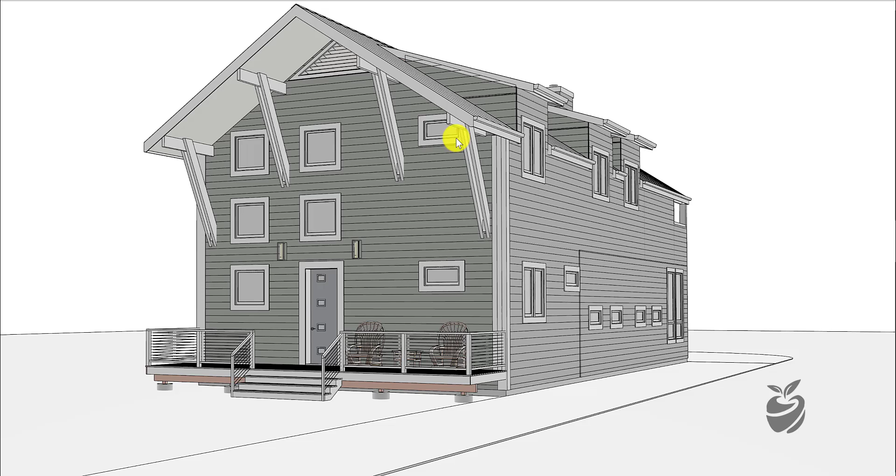One of the owners asked to make sure we could have a two-story space when we enter, and so we're granting that with a stairwell which goes up, and the ceiling will come from 6 feet and then come up, stop at 10. So we have 10 feet floor to floor on both floors, and the style is sort of craftsman-y, with the required structure to hold the roof, the 8-foot roof extension.

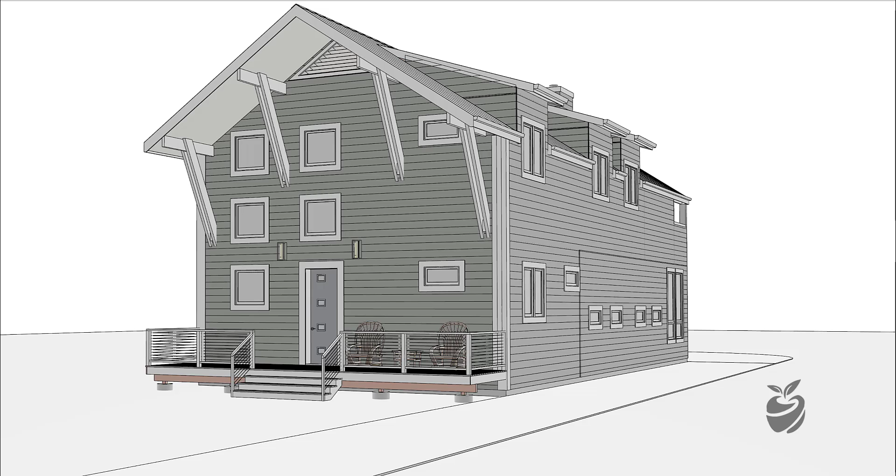Up above we will be venting the attic, and it'll have an incredible amount of insulation piled up to about here, for about an R90, and then we're going to vent all that. We'll use a stainless steel cable system, so sort of a contemporary craftsman look.

As we start to go around the house, the bedrooms are upstairs. We have escape windows, and an office with window lining up there. We have a bathroom window on that level, and here we have countertop level windows with cabinets above in the kitchen area and an entertainment room area.

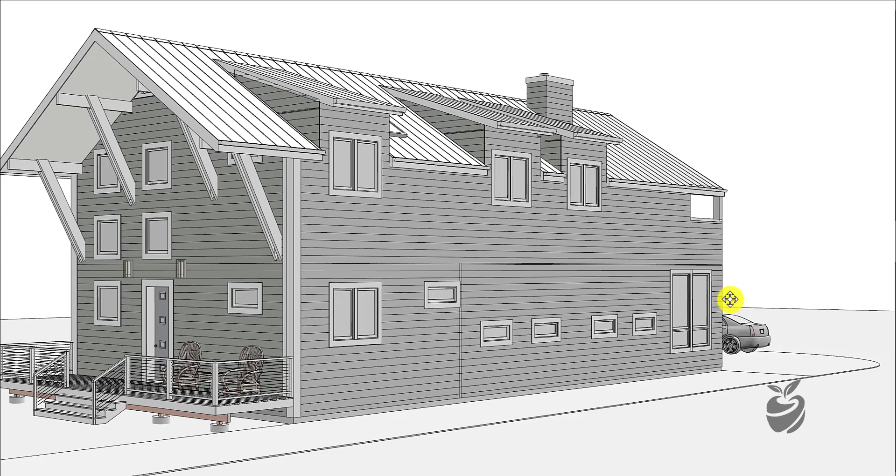And then we have a sunroom, as this faces west. Going around to the back, we have an incredible amount of nice sun. We also will have a chimney with a fireplace that comes up.

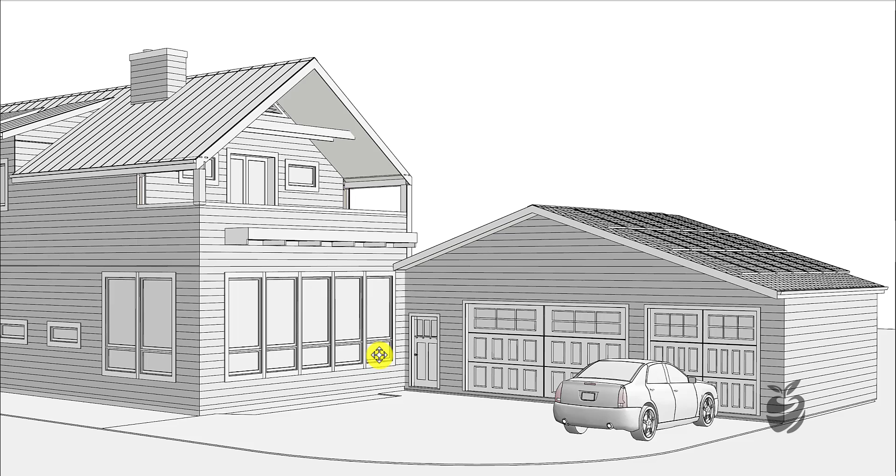Around to the back side, the sunroom is 13 feet wide on the interior, similar to another room that was shown, so the furniture placement can be the same. This one will have all the operable windows down below, fixed units up above. These go from 9 feet to 1 foot off the floor, so there's an extensive amount of glass facing south and west.

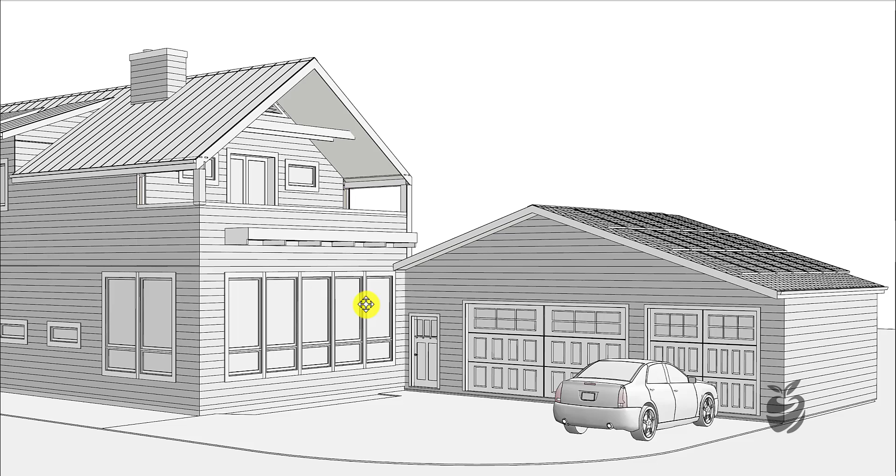We will provide a protective overhang that will allow the south sun to penetrate in the winter and shade in the summer, so it doesn't overheat. And up above, on the back side of the master bedroom balcony, we have cross ties and beams to support the roof extension across the balcony.

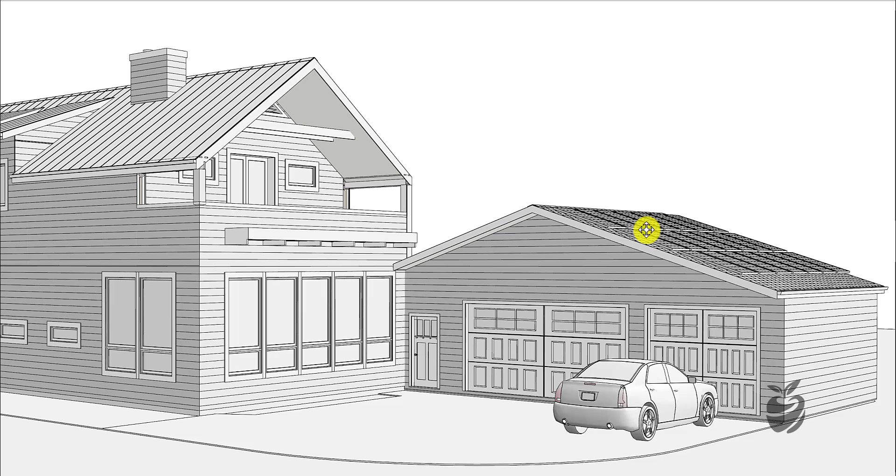Facing south, the roof over the garage goes east-west, so in this direction, so that this faces south. The ridge goes east-west, this faces south, so we can have a solar array on this portion of the roof. We create an overhang here because we're going to need a little bit more roof area to have the panels we need for enough power for the house.

Here we can see a little peek of the balcony space above, the sunshade device, and the dormers that spring from 6 feet and very quickly go to 10 feet. Skylights at the bathrooms here and here. Laundry room.

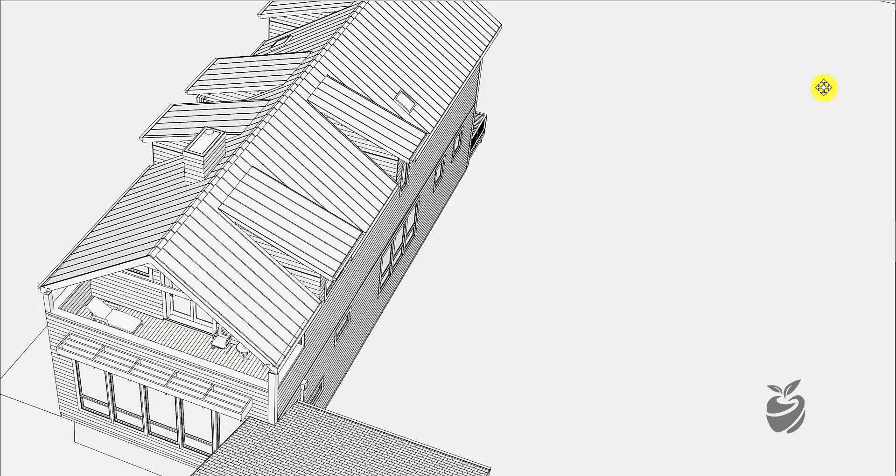On the side facing east, we have large windows in the dining room that spring from 8 feet, with operable windows on the bottom. These are part of the stair, which is 2 stories in the foyer area here. This stair goes down to a new basement addition. A little window in the mudroom.

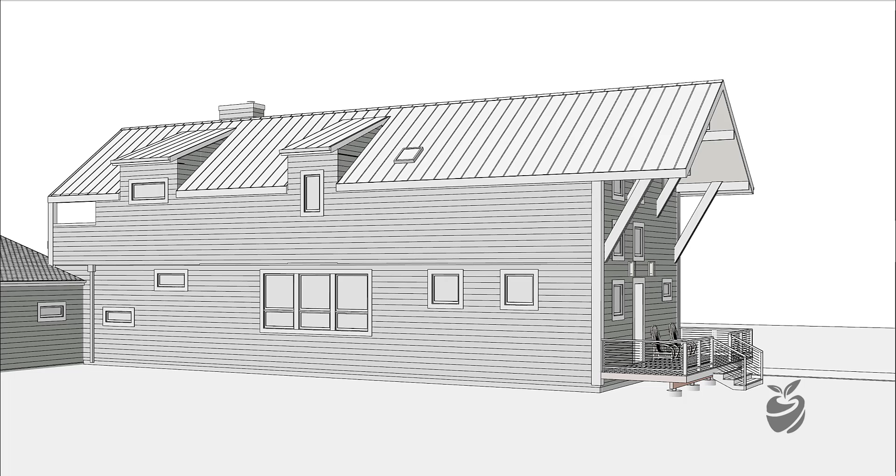If the budget will allow, we will go for a metal roof. If not, we will go for a shingle roof. That is on the garage.

A peek of the floor plan of the basement. See where we have now created an existing crawl space. We will add a basement that will be about 9 foot clear to the floor, and then a 3-car garage.

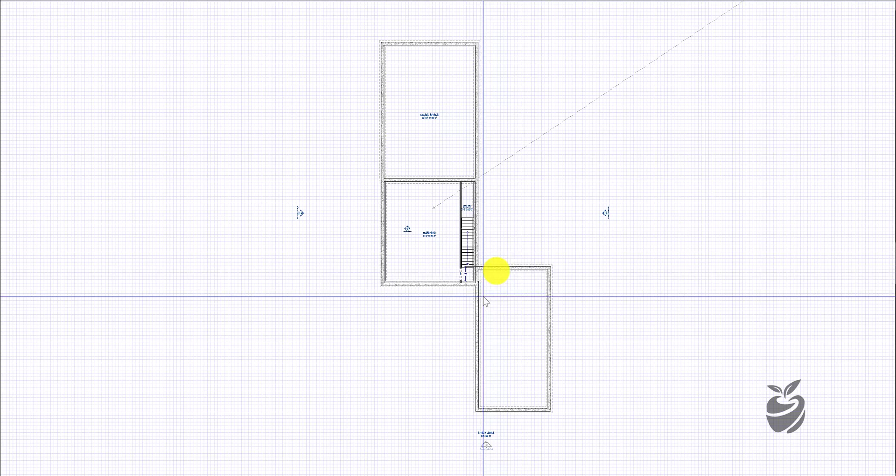Okay, let's take a peek inside. You can see the 2-story foyer as it comes up, and we have the same contemporary railing detail there, with windows

that rise up. Since we have a 10-foot ceiling, we don't have to have a 10-foot closet. We stop the closet at 8 feet and continue that ceiling detailing all the way across. These are 3-foot centers, and that just creates a nice feeling that this is a large loft sort of space.

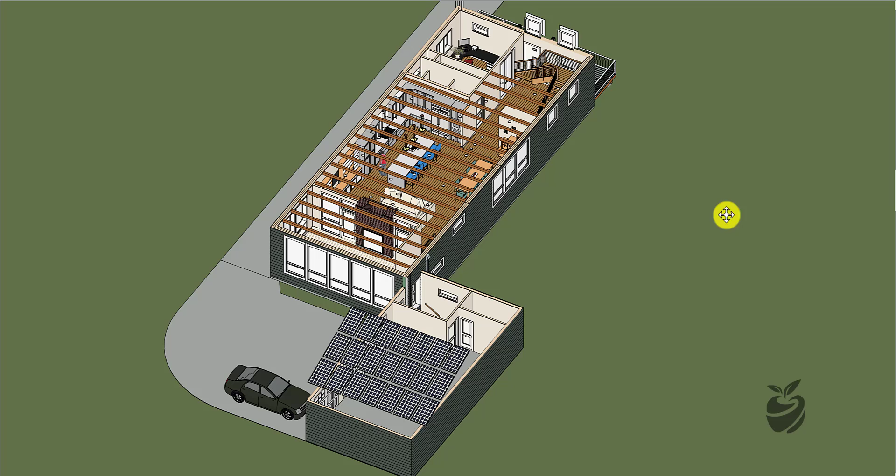8-foot glass doors into the office area. This can also be used as a bedroom sometime in the future, so we have a closet built in. Maybe we take the doors off and this becomes shelving space until it becomes a bedroom.

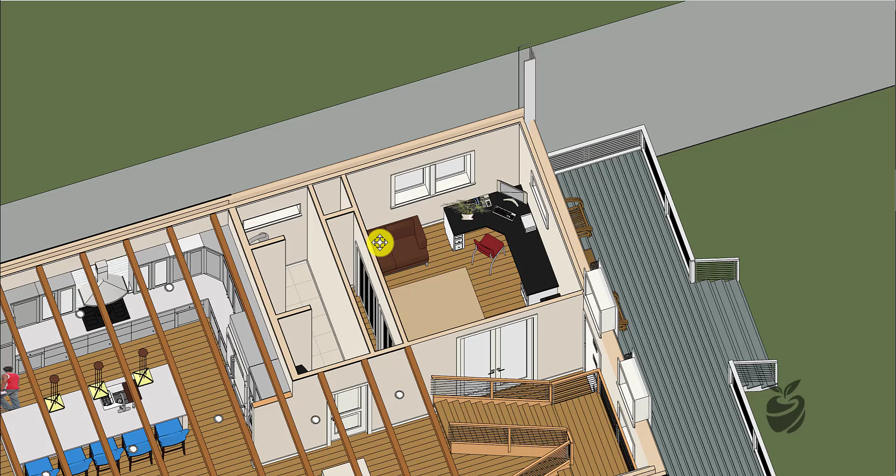The powder room has a very nice sink, about 4 feet across, very generous. We hide the toilet so no one can really see it with the door open coming by. And then we have a roll-in shower, so the wheelchair doesn't have to trip over a bump to get into

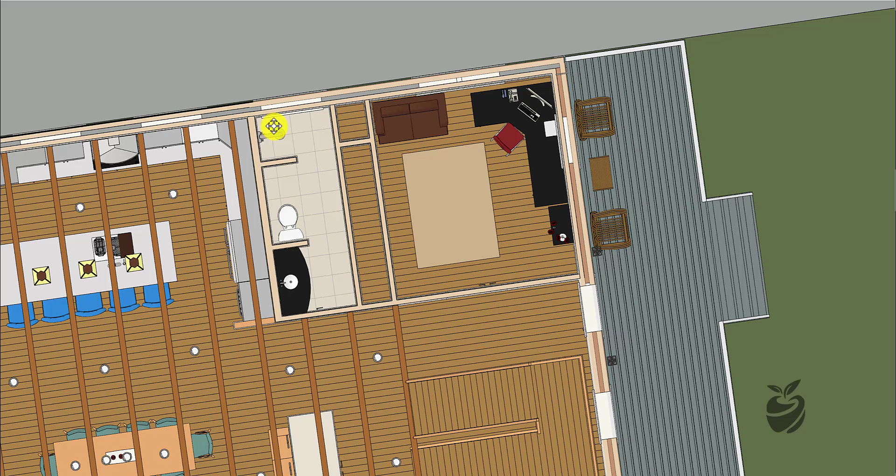the shower space. As we move into the kitchen area, we have oven, microwave, 4 foot of refrigeration, countertop, cooktop, induction because it is a net zero home, so we don't want gas combustion occurring.

Glass cabinets on each side, very similar to another home that the clients liked, I believe the parents' home. Again, a large 12-foot island, very similar to the setup in their parents' kitchen, which they like.

And then we continue with some possible built-ins on this wall for the family area. Put the TV here. If we need to make it bigger, we can make these a little smaller, have a wider screen, maybe even with a tilt-out arm, so that people sitting here can watch the TV, if TV is a large priority.

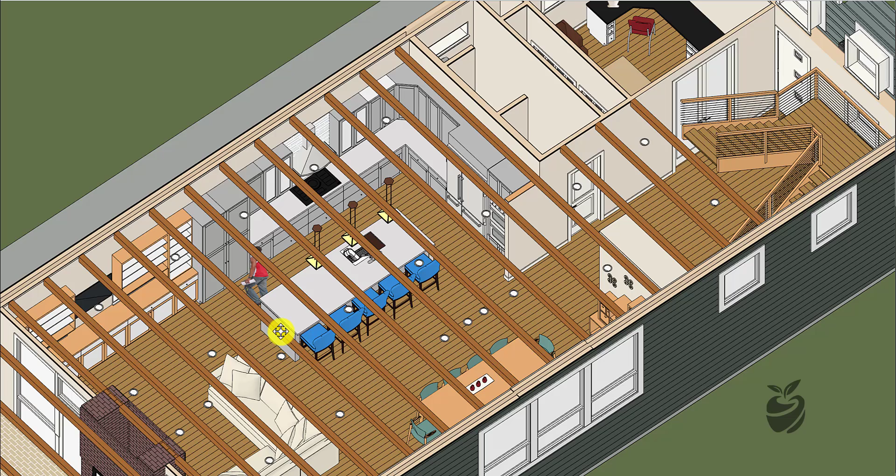2 large pantry cabinets, which is plenty for a young family.

A very nice dining area can be developed with a long table, and again, it faces the window. There's a nice tree in the 20-foot side yard that we'll have a wonderful view of.

We place the windows up at 3 feet in case we want to put some furniture below the windows here, adjacent to the dining room. Something like this can easily fit below there.

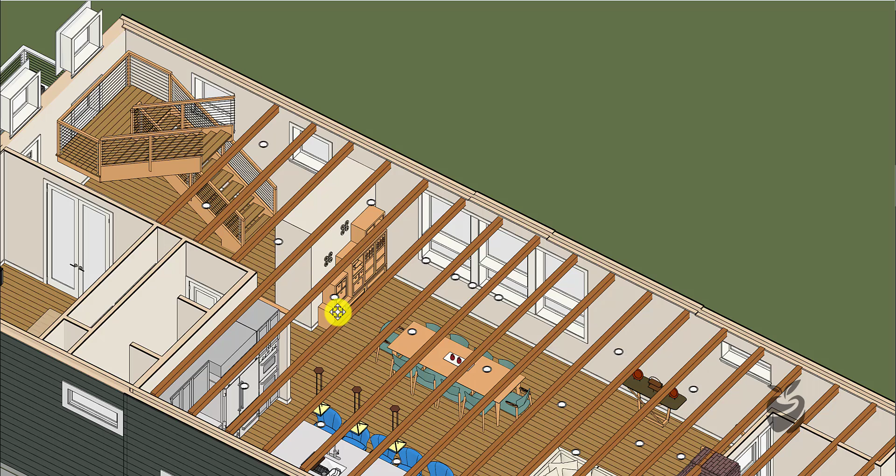Some light to highlight the stair going down to the basement. Maybe this is the area for the china cabinet.

Here you see the stairs going down to the basement. We have the same railing detail, and a lower window that follows the stair to light up that stairwell.

And here we have the main feature of the house, which would be a masonry veneer fireplace with gas log burners, glass. We will seal it off on both sides. It's see-through so that we don't lose heat in this passive home.

We can't really afford to have air coming in and going out the chimney with all our energy. We're really trying to minimize the heat loss, so getting very, very tight construction is very important.

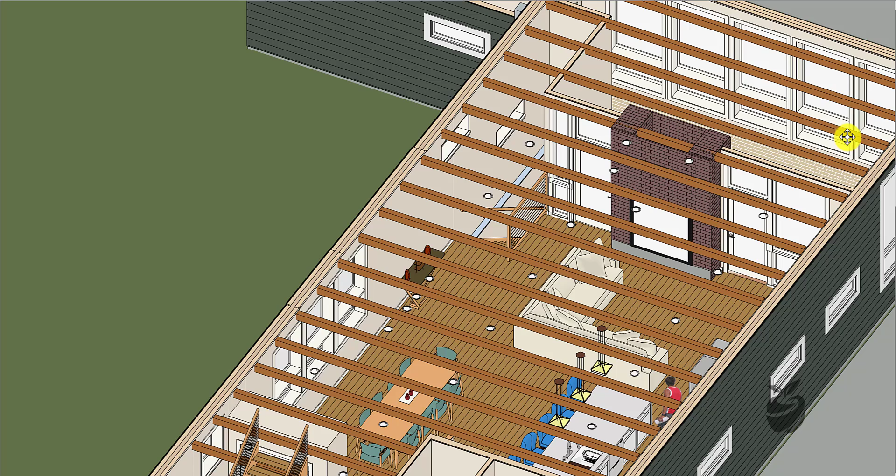The sunroom features a tile floor because we want to pick up passive solar heat when all the sun penetrates through the glass. It then can heat up the tile, and the tile can then absorb it as it slowly irradiates it back into the house.

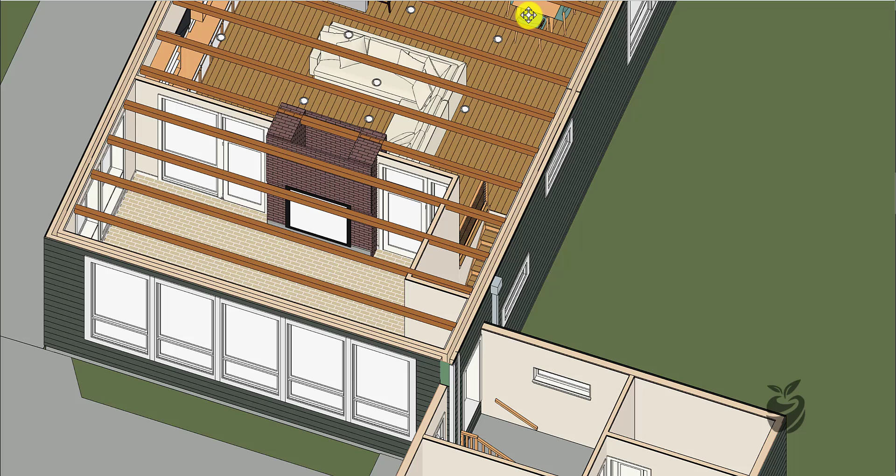And we can control the heat by opening the windows if it gets too hot, and we let it into the house with the doors that will open, and perhaps also a fan which will take this heated air and circulate into the house. I'll probably use a Zehnder system to make sure we always have circulation of nice air into

And the people from the garage going through this door and into the mud area hang up their coats, boots, and then enter the house and go up.

Here we're going to have the electrical room, as we'll take the solar stuff, feed it down into the electrical, into the inverter, and we'll have the battery storage in here, in this room as well.

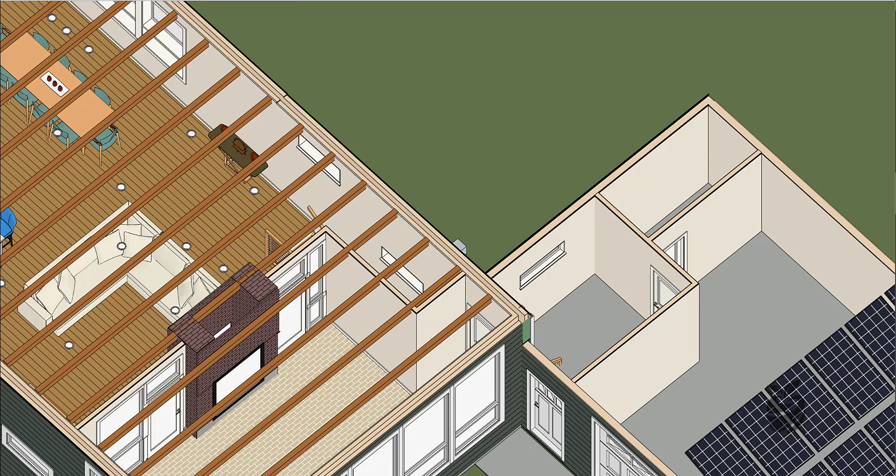Okay, the master bedroom, balcony area, overlooks the wonderful yard. I thought it would be nice to just keep it nice and private with the 42-inch, actually 36-inch half wall.

And you can sit down, read your book, and even in a light rain, we have the covered roof. So it's a very private balcony area with a 5-foot

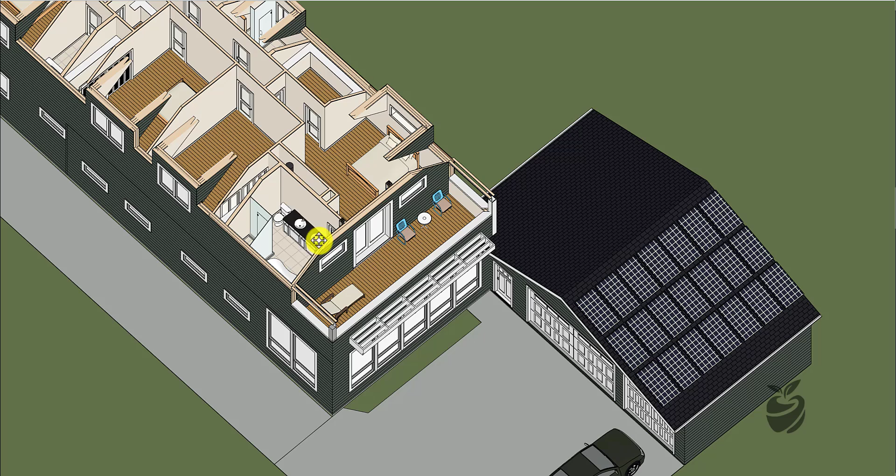door that leads you out, and windows into the bathroom, a window into the bedroom, a window above the bed, plenty of room for a dresser on each wall, and a night table.

Let's take a peek at the bathroom a little closer. When you enter the bathroom, you'll have a tub and a nice shower. So that's your view. This is at 6 feet, and then it very quickly goes to 10 feet.

10 feet. The dormers are over here.

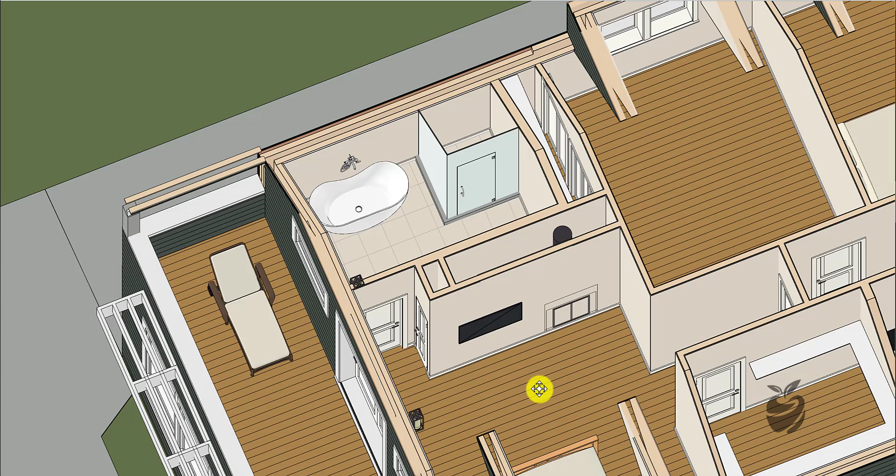We have a his and her vanity, mirror area, and a toilet for a very nice master bath. In the bedroom area, right across from the bed, we can perhaps place a big screen TV.

We do have the flues coming up from downstairs, which will be in this area. If we want to, we can have a second fireplace, or no fireplace and just put some bookshelves in here to save a little bit of money. So we do have the option of putting a second firebox upstairs.

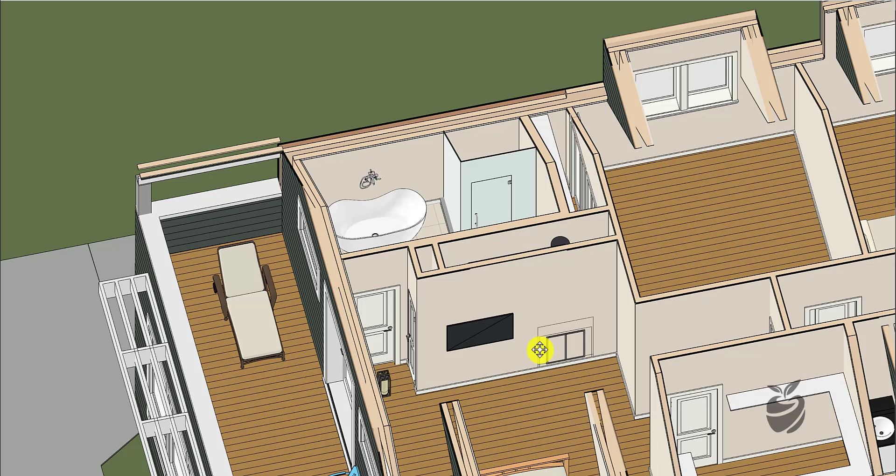Originally, the idea was to try to build a masonry fireplace all the way through, but because of the basement—here you see the basement—if we have our firebox here, which is nice and symmetrical across the width of the building, a masonry firebox, we'll have to build a masonry foundation for it, and it'll really split up that basement space.

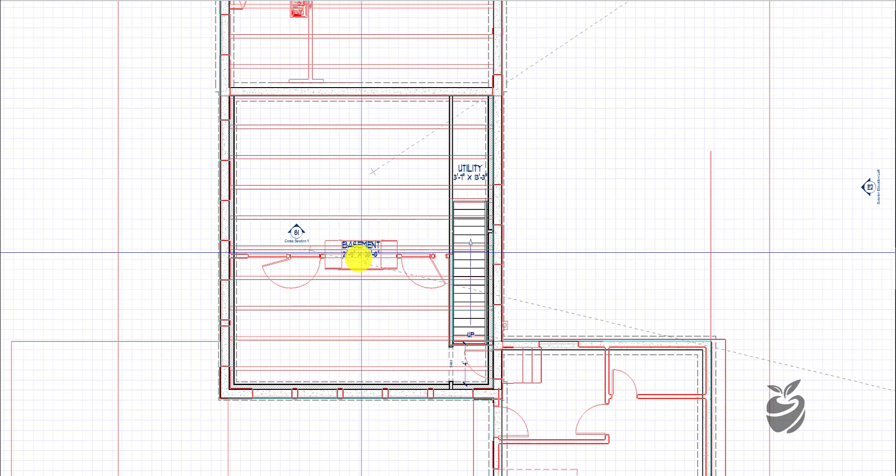So I think we want to have a nice clear space for the kids to play, so they have this large 30-foot room. We'll just put double trusses across the span, and then we can use a lightweight concrete firebox for the first floor.

Here we see in red the layer downstairs, and we have the firebox, and the flue would come up. In this area, we have the option of placing a prefab over here.

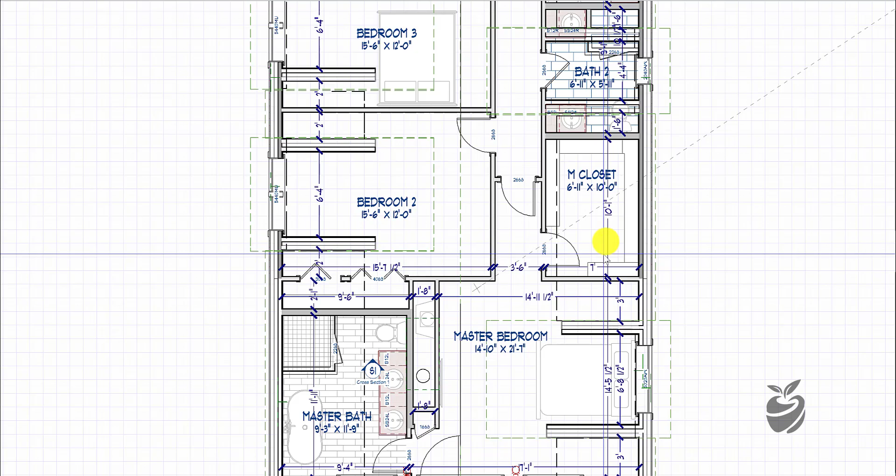We have a large walk-in closet, 7 by 10. Entrance from the hall is there. We have a door there, so we keep the wall space for dressing on this side and this side, with the high window there.

All right, taking a peek at a cross-section through the bedroom area. You can see the 10-foot ceiling here. We have the 6-foot spring point there, so a 6-foot-tall person is fine with no problem with head height. One foot away, you're at 7 feet. Two feet away, you're about 8 feet, and then you're at 10 feet.

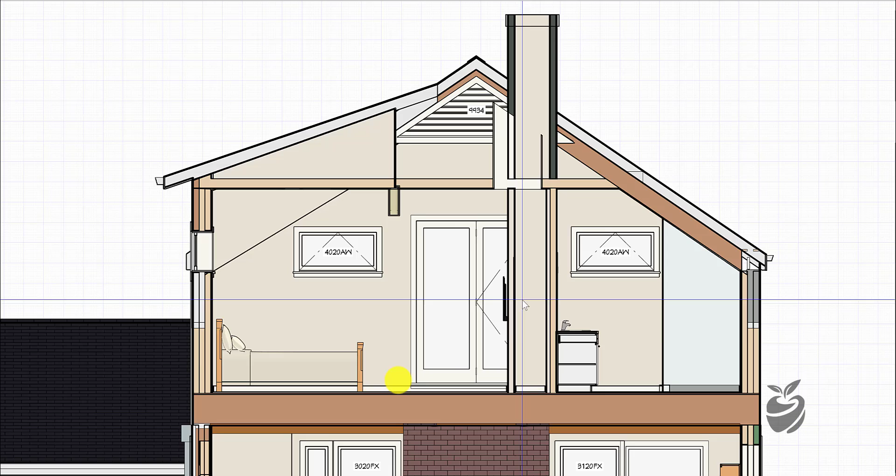Over here, same with the shower—6 feet on that side, you're at 8 feet, you're at 9 feet. That's about 9 foot when you enter the shower in the bathroom.

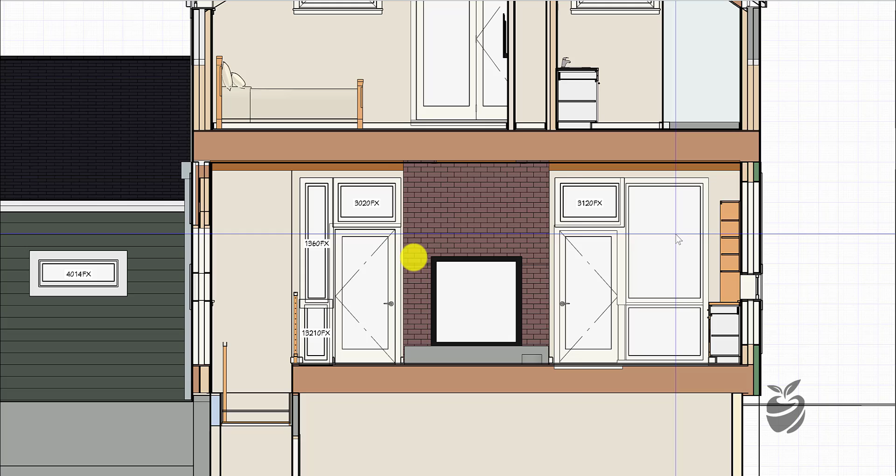The section drawing also shows the 10-foot ceiling. Windows are at 8, operable as counter height. This is at 9 feet. And a 6-foot door, all glass, into the sunroom.

Okay, kids' bedrooms are very generously sized. Closets, his and hers, matching closets. Again, the dormer that gets you to the 10-foot ceiling. Bathroom with a dormer that also gets you to the 10-foot ceiling.

His and hers, sort of Jack-and-Jill-ish, though we really can't connect them as a true Jack and Jill. I always think Jack and Jill bathrooms are actually a lot of waste of circulation space, because they take up a lot of room to get in on two sides. Here, it's a very compact use of space.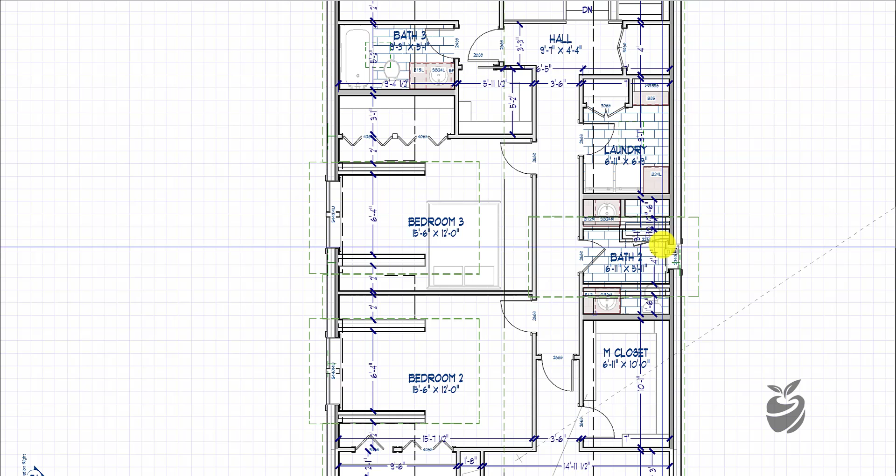Shower, toilet, in a nice-sized room. You come up the 2-story stair space, and you're in the 4th bedroom, which is a private bedroom with its own bath and a skylight for light.

And a laundry area, also with a skylight for light—washer, dryer, folding area, cabinets, and a very large linen closet for towels, sheets, etc.

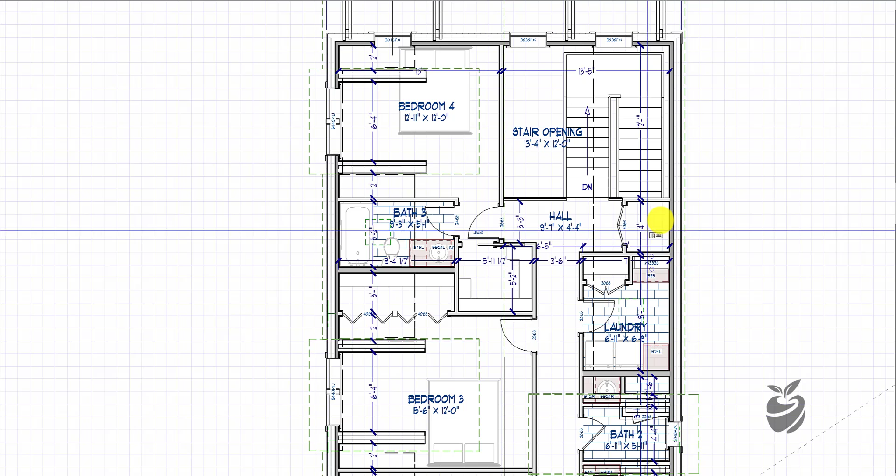Also nice, generous closets for this bedroom as well. And this is a possible utility area, depending on work with the consultants, for how we're going to take care of the heating on the 2nd floor, or bring it up from the basement. So that's something that needs to be discussed.

Okay, from this perspective, you can see the stair up to the hallway, the 5th bedroom, utility space, laundry area, shared bathroom, and a large his and hers closet for the master bedroom.

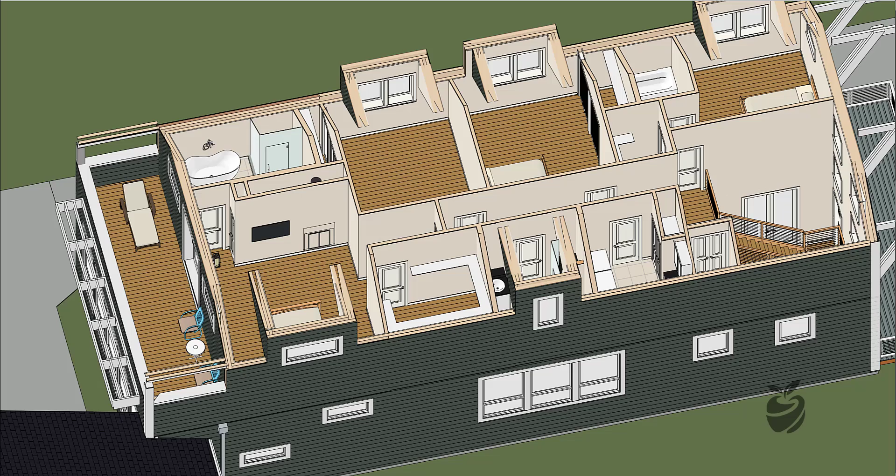Very nice balcony overlooking the beautiful backyard. Nice master bedroom, and the two matching bedrooms.

This elevation view, you can see the solar array on the garage roof, and the cross tie there for the balcony, which occurs at 10 feet.

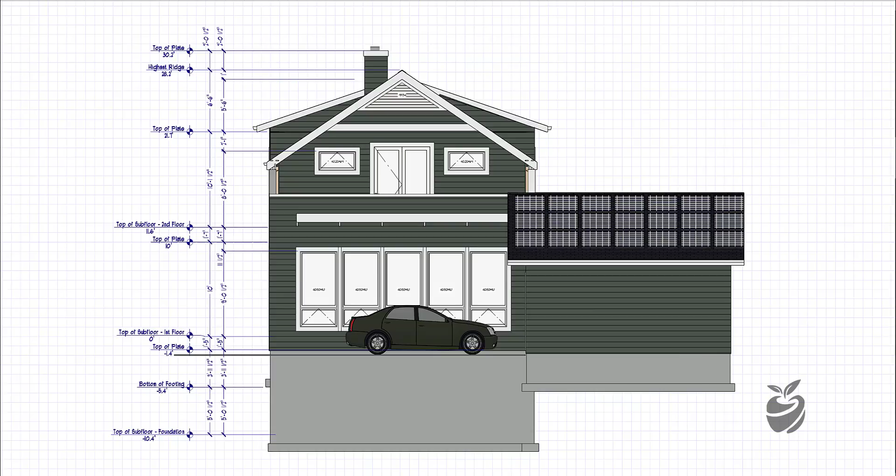And the large 9-foot, almost floor-to-ceiling windows in the sunroom, the shade device, and the ridge—28.2 from zero, but it's actually measured from grade, so we're about 2 inches off of the 30-foot from the grade line, to make sure we're in compliance with the height restriction.

There you have it, a beautiful net zero house in suburban Chicagoland.